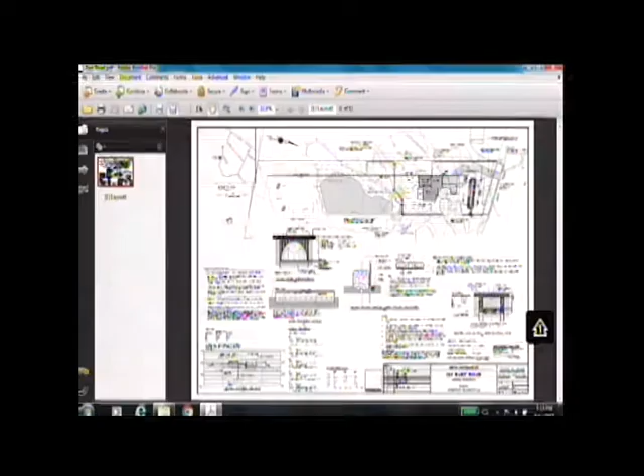Good evening. My name is Jim Swift, professional engineer, landscape architect at 102 Village Drive, Shelton, Connecticut offices. I was mysteriously absent from the last meeting where we were on the agenda. I was on vacation and had neglected to let Scott know to table the item, so I apologize to the commission for that oversight and confusion.

What we have here is an application for a single-family house that was approved in August of, I believe, 2012. And in looking to obtain a building permit, we discovered that there was an error on the plan.

If you look on this section of the plan, you'll see that there's a roof drain galley or infiltrator that was supposed to take the roof drainage from the house. It is going to take the roof drain from the house. And if you look up in this corner here, there's a domestic service well.

At the previous application, that well was located very close to the infiltrators. That's a violation of the health code. Wells need to be at least 25 feet away.

So having found that error, we corrected the plan. We moved that well to 25 feet away, to the new location that you see up where the indicator is. It's farther from the regulated area and meets all health code at this point.

When we filed that application to amend the improvement, Scott had done a report, and he pointed out there was also one other oversight in the 2012 approval, which is that the commission normally requires wetland signs be installed at the limits of disturbance. You can see that during the revision where I moved the well, I also now indicate where those wetland signs will be. So that's the limit of our application tonight, to amend this approval, to move the well, to add the signs, and I'd be glad to answer any questions the commission might have.

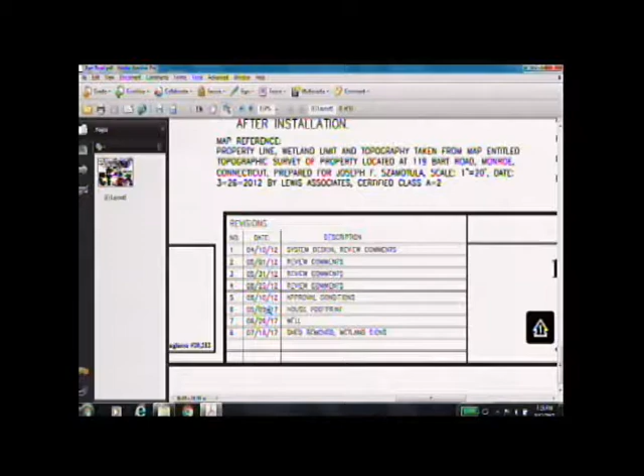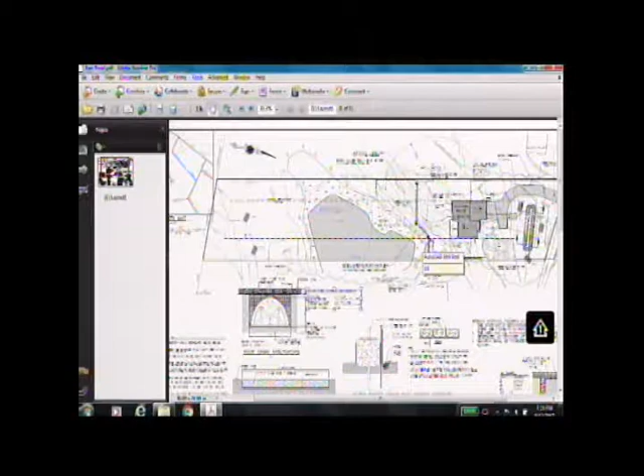So Jeffrey, this disturbance limit line comes up just where the fence is, up and over. There are activities that occur out there, but they're plantings. But you see how it jogs into the wetland boundary? See it V's in, the limited disturbance, well, this is the wetland boundary.

The wetland boundary is that thicker dashed and straight line that goes up and over, right here. And go back to C15, wetland flag 15, that circle right next to the planting, see that dashed line that goes into the wetland, down? That's a contour line. It's a contour line, but the limited disturbance line is shown to that.

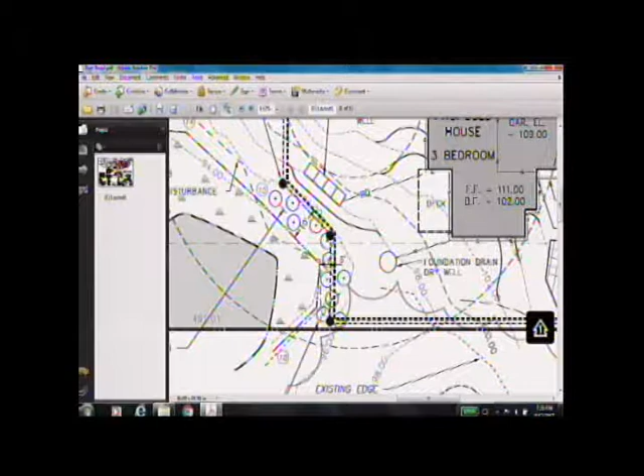I don't understand how that could be. So the contour line goes into the wetland, so are you filling the wetland? No, that's an existing contour. The proposed contours look solid, so this 94 line is an existing contour. It looks like a proposed contour line to me.

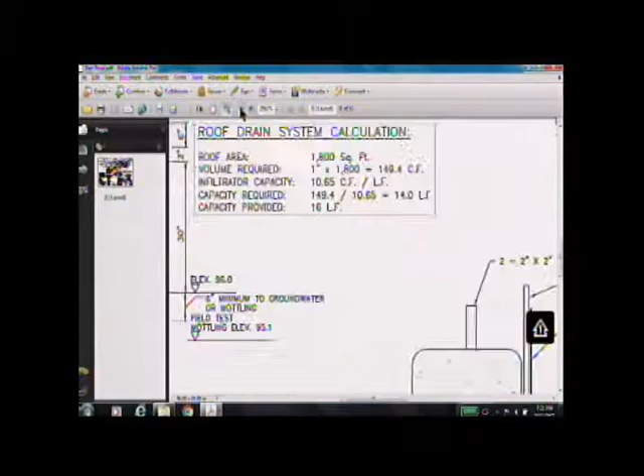Oh, I see what he's talking about now too. Yeah, it's a limited disturbance line. You're right, because it does have an arrow pointing at it saying wetlands limit of disturbance. What are you trying to do? He's trying to get back to that. Yeah, I'm trying to get back to that.

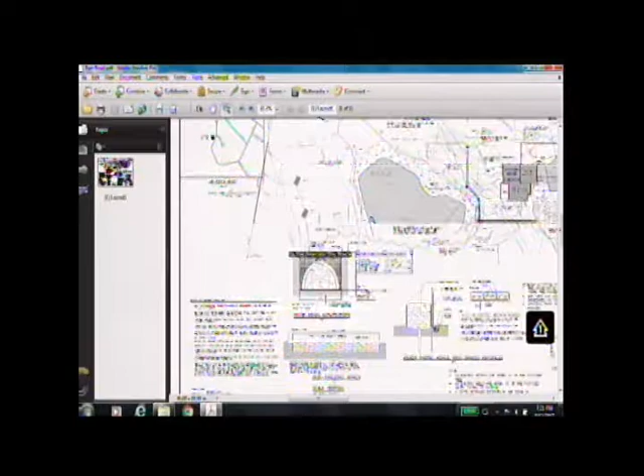I think I saw what Jeff is talking about. Now put it on the hand tool. Limit of disturbance - okay, see that line? There's the limit of disturbance. That line is an existing limit of disturbance, where, among other things, it's basically the existing limit of disturbance.

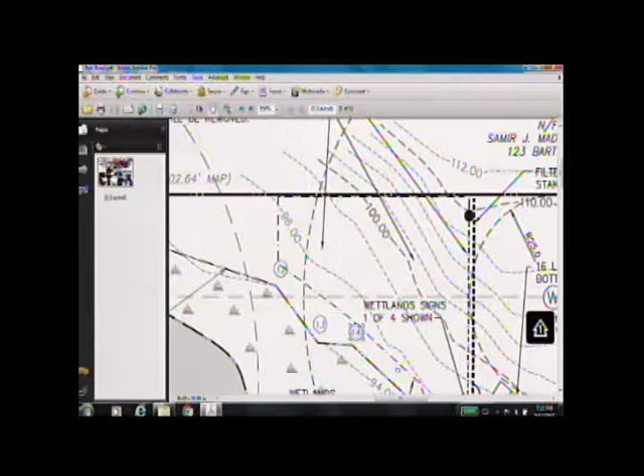And you can see how, when you come up in this location, you see tires and debris and deposits to be removed in that general area, and then you can see that dashed line. What that dashed line is trying to say is there's been activity in there. Yeah, I can appreciate what you're saying now.

There's this little triangle in here that's not a proposed limit of disturbance, it's what had been disturbed in the past. I think the idea in that triangle is that the disturbance might have been a tire track or something like that. At the time in 2012, it was just something that should come back on its own. It wasn't worth going in there and trying to regrade it or anything.

We do have some plantings in there. The only thing I was going to suggest is you could probably add 2 more nannyberry or something like that. I was trying to understand what that objection was - if that was a proposed limit of disturbance in the wetland or not. In the original application, when we went out to look at the property, they had disturbed that area when they went in to do their testing.

So if you were to suggest a couple more nannyberry, we would have no objection. So what's the condition of the area now, now that we've opened up this discussion, between the existing limit of disturbance and your proposed limit of disturbance? That area has been disturbed. What is its condition at this moment?

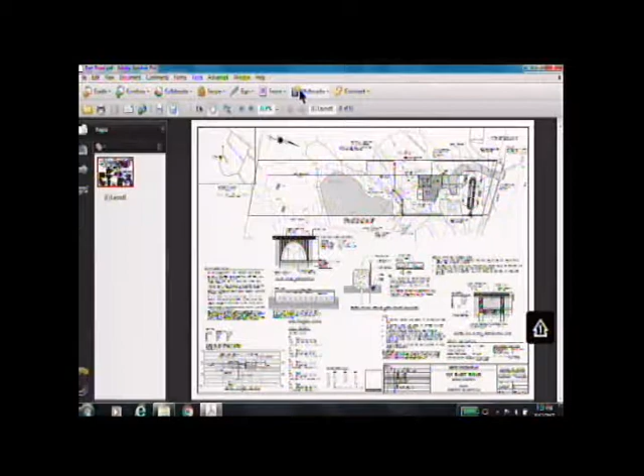Coming up next, IWC 2016-04A1, 34 Enterprise Drive, All-Star Transportation. This is an amendment to a previous approval regarding the water quality basin, removal of amphibian barrier, reduction of pavement area, and revised utility location.

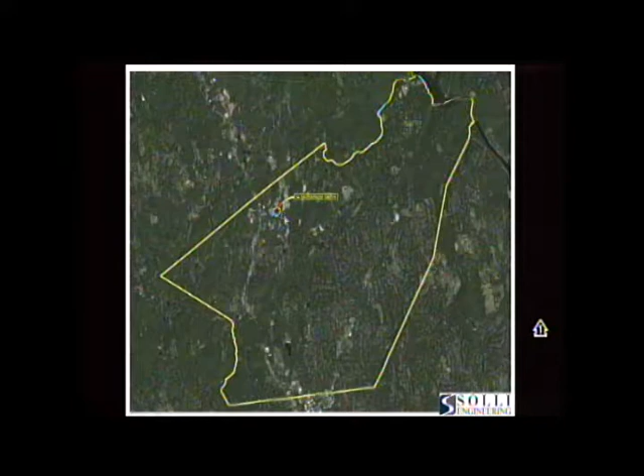Just to orient everybody, here's an area of Monroe. 34 Enterprise Drive is located as part of the Pepper Street Business Park. Here's an aerial of the site prior to site development, prior to approval. There are wetlands on the property.

The project was approved by the commission, and what it included was essentially a large bus parking lot for All-Star Transportation for the school buses for the town of Monroe, and a fueling pad and a small office for the bus company. This project has gone through construction.

There were some construction revisions that we had looked at, and we wanted to come before this commission to review some of those. Just to give you guys some history, what you may remember is part of the original approval.

When we first came before this commission, we talked about how we initially were proposing to surface this lot with millings. And there was much intensive debate regarding the use of millings on this property.

When we initially started that, one of our water quality measures to provide additional protection against the possible use of millings as a surface area was to provide additional renovation for any potential stormwater. So one of our considerations was we designed our basin to be wet bottom, so that standing water would allow for some additional renovation of the stormwater runoff from the millings itself.

During the approval process, we ended up removing millings from the plan, and it was proposed for that surface to be paved. However, we never went and readdressed or changed any of our water quality measures or modifications to the stormwater basin. It's one of the big...

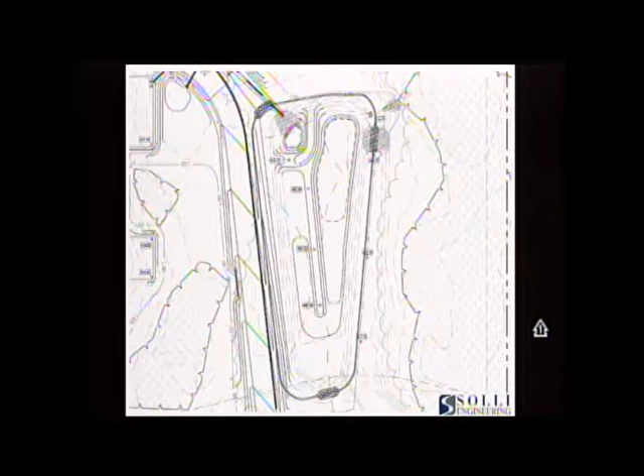This just shows—I should have gone to this slide, I forgot this was in here, Jim—this is the previously approved basin layout. You can see the sediment forebay meandering around a berm, and then this was the wet spot. And then you can see our proposed changes; it's very minor in terms of modifying the grades, but it does achieve the desired goals.

And we have actually been going back and forth with Scott as part of this project closeout to do our as-builts, to verify that the grading is achieving what our design intent was.

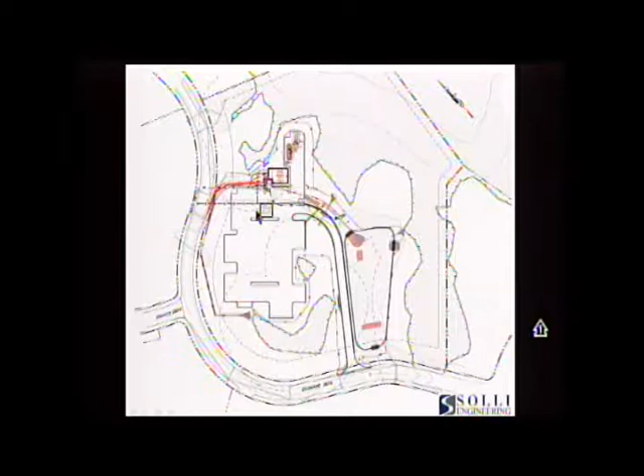From a utility standpoint, this is the previously approved utility plan. Very minor changes to the location of some of the underground utilities. We changed the septic system from a galley system to a stone trench system—it does not have any impacts to the wetlands. You can see very minor modifications to the locations of the utilities coming through here in the stub locations, and none of those revisions would have any adverse impact to the wetlands.

I think it's certainly achieved the goal. We wanted to find a place for the buses to park, and they've been able to do that.

On the first page of your memorandum, you also say that you're removing a swale that had been proposed. You haven't mentioned that. Well, that's the berm. That's the meandering through the basin. No, this is a swale that was proposed as a center island for the bus parking. I don't think you're parking the buses in the detention basin. Oh, that's true, excuse me, I apologize for that. At one point, and actually, I think that was actually one of your referral comments. We had initially shown

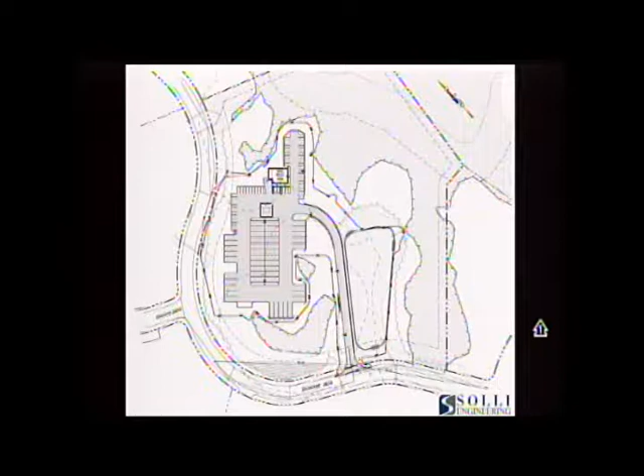Wasn't it also supposed to assimilate some of the drainage from the parking lot and treat it? Well, it was initially, but again, our primary measures were from a water quality separator here, which collects the drainage from this, and then the rest of this drainage does go into our swale and is discharged into our sediment forebay, which again meets the requirements of the water quality manual.

How come you removed the swale, or the berm, in the pond? We wanted to make sure we provided the necessary stormwater volume. So the serpentine swale that you had, it was for a water quality purpose, but you're saying it's no longer needed in order to meet the objective of your water quality volume?

Correct, yes. And again, in the absence of your participating in the original commission discussion, a lot of that was because we were proposing millings. We wanted to make sure we had that additional renovation, so that's why we initially proposed that berm in the first place.

The question I have is, I don't understand, if you're taking that wet bottom and you're keeping the elevation, basically the surface of the water the same, why would you change your total volume of the pond at all? Well, we eliminated the wet bottom, so we brought it up a little bit. I mean, if the pond is full all the time, then you're not getting any additional storage.

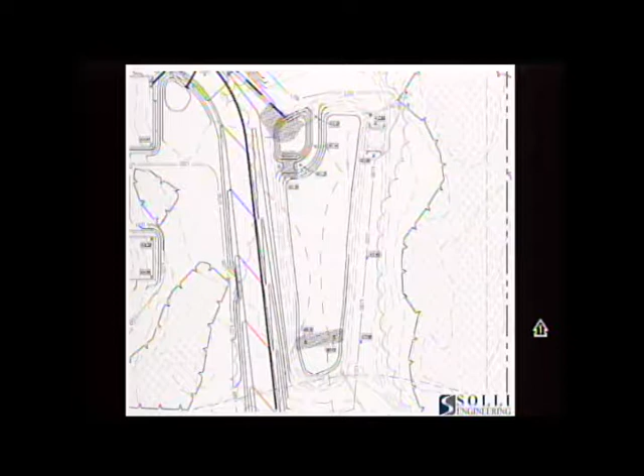Sure. The other consideration for that, and again it's all slowly coming back to me, was the outlet control structure. One of the other components of our previously approved plan was actually modifications to that outlet control structure and reconstructing the outlet. We wanted to revise our model to try to keep that outlet control structure so we could avoid the disturbance of putting in a new structure and potentially the outlet that discharges to the wetlands. We've been able to maintain that existing outlet control structure to eliminate some of that additional disturbance in the basin itself. So by revising our analysis to reflect the existing outlet control structure, it required minor changes to the grading of the basin.

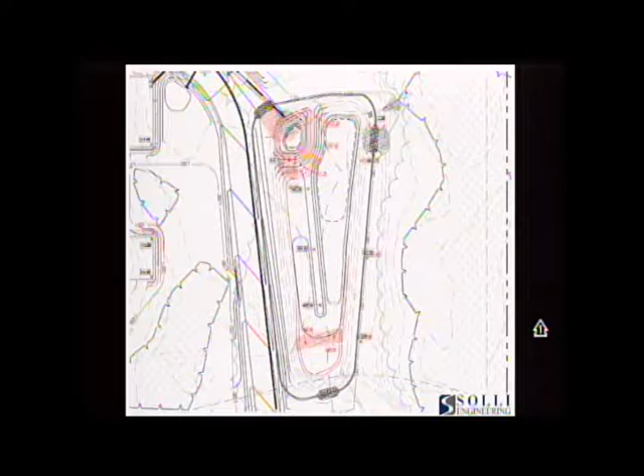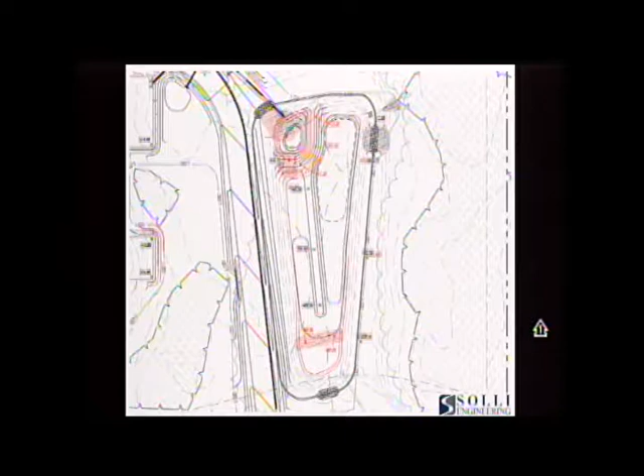You were talking about the amphibian barrier. Yes, in the original application, were there documented amphibian species observed on the site? No, there were not, but it was just a recommendation. There have been vernal pools established in close proximity in other applications, so we were within that terrestrial habitat, and since we were proposing the wet bottom, we wanted to make sure we were preventing it from being a decoy.

The next question was going to be if they found these cryptic pools, part of a swamp that will flood and you'll get species breeding in some of these, but they're not technically vernal pools, you could have those spotted throughout. There's a significant amount of wetlands here, so it's possible, but I understand, and would rather see a dry basin anyway.

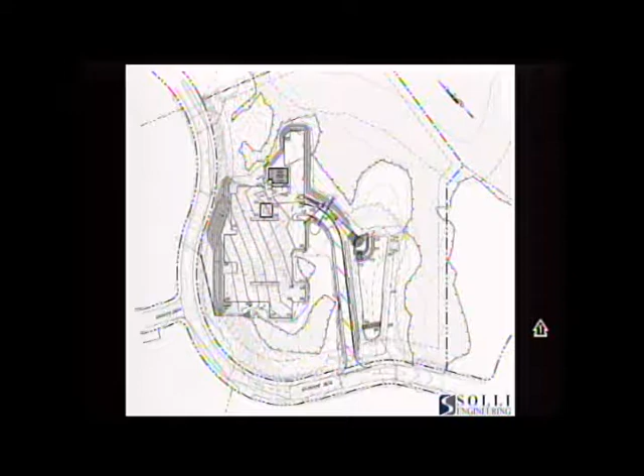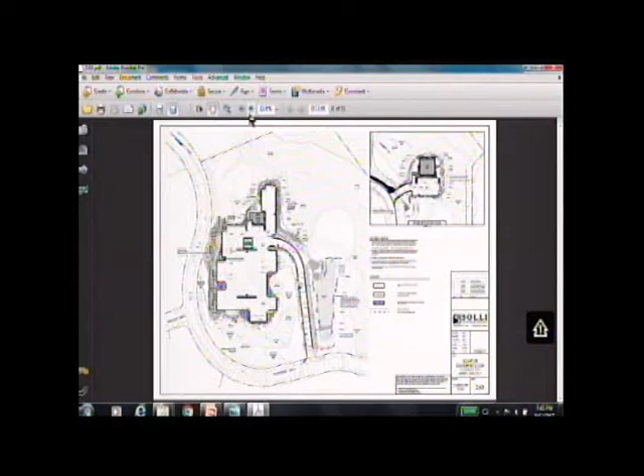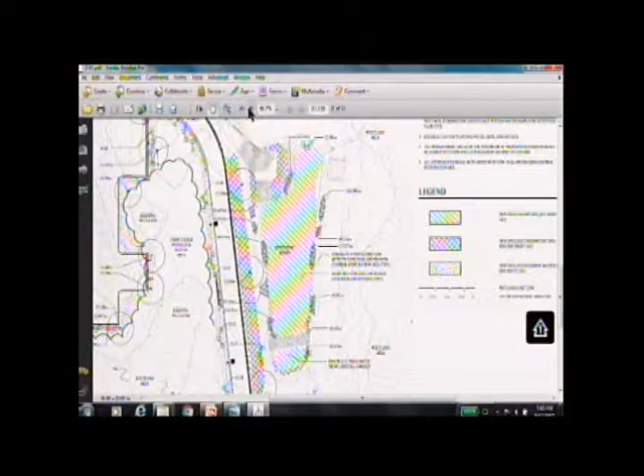Which leads me to, was there a planting plan developed for the wet basin that we should be looking at in terms of modifying for the dry environment? Yes, and we did make those very minor proposed tweaks. Previously we had a number of plants in and around that center berm, and we basically shifted them out to the edges of the perimeter of the basin itself. We maintained the same quantity and type of plantings that were previously approved, and just provided them around the perimeter of the basin rather than within the center.

So what's on the bottom of the basin? New England wet mix seed mixture. What's on the slopes right now out there? It was probably seeded with that at one point, but it's kind of just, yeah. But it's stable, right? Yes. But again, as part of this, there was some disturbance, and now it's being reestablished.

And essentially, this is the last item - surpassing this commission, getting this commission's approval will be the last item to let this property get its certificate of occupancy and continue to transport our children.

On the second page of your memorandum, under the grading and drainage plan, the proposed forebay spillway has been modified to include riprap stabilization with a 6 mil plastic sheeting. Is that normal? I don't remember talking about plastic sheeting. It's something we put beneath the riprap just to help stabilize it. It's somewhat of a standard detail to make sure that it's protected. We've been incorporating it into a lot of our details. I just didn't know about it. It's kind of out of sight, out of mind.

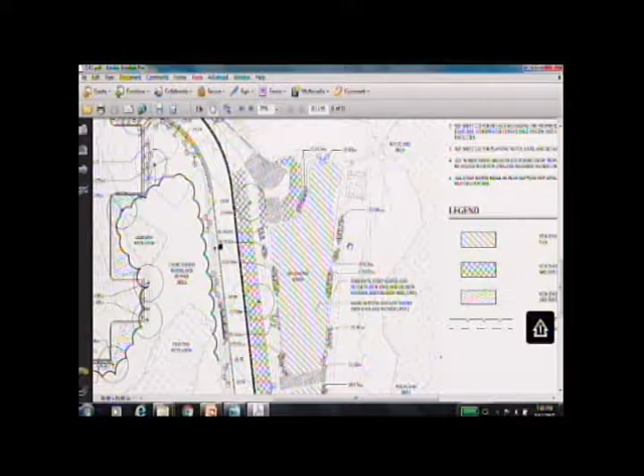I'm just thinking of ways of handling Enterprise Drive, if there was a storm event and you were in the process of mucking around in the basin, of handling that water.

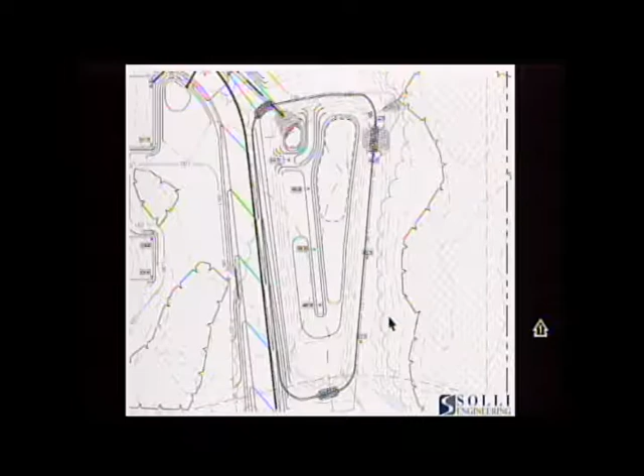The first step would be creating a stone berm as a forebay on that end temporarily. There is one shown on the plan - sorry if I didn't articulate that clearly. You can see here there's a stone berm and a forebay on this end, so the discharge from the town does go in there. We'd recommend writing a letter to Public Works suggesting additional maintenance of some stormwater facilities in the business park, because there does seem to be some sedimentation buildup.

But there wasn't a formal construction sequence, or am I missing it? Well, it was approved as part of the original approval. It wasn't something we were proposing to modify, so it wasn't included in this submission. But you're modifying an existing one in a different manner now, so how does that sequencing work? Are you saying the sequencing is the same? What we did to protect it is make sure we had those measures in place. Is this already done? Yes. So it's already in this new situation? Yes, it is, and it was done over a period of a couple days. Oh, I thought this was coming in to be proposed as a change. It is.

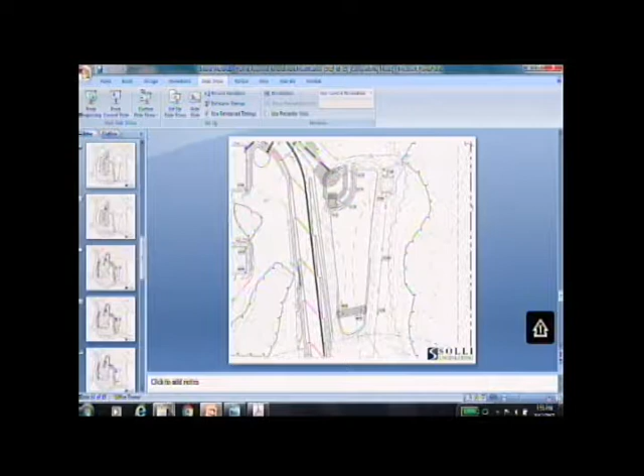So I feel pretty comfortable with this, but I just wanted them to verify that they have the information. Our surveyors were out there again today to verify the elevations, and they had met the 408 contour at the base. And you just indicated that you have the test pit information. I thought we had submitted that as part of this. I couldn't find any test pit information. I know it was in our analysis, but we can certainly provide that.

Following up on Jeff's concept, so if this project is basically done, then the drainage is already going into the basin from this whole bus yard, correct? Yes. So how are you going to plan to do the work, since you're doing so much change to it? Or is the change already done? Change is already done. So we're approving this after the fact? Yes. This is John Kimball, let me just step in here for a second.

I'm at 1428 Monroe Turnpike. The existing basin outlet was at 408. The excavation did not go past the approved limits of your approved plan. We excavated, we just didn't over-excavate to your approved plan, and we didn't install the berm. So we didn't do anything beyond the limits of what was approved already. We just haven't, if you said...

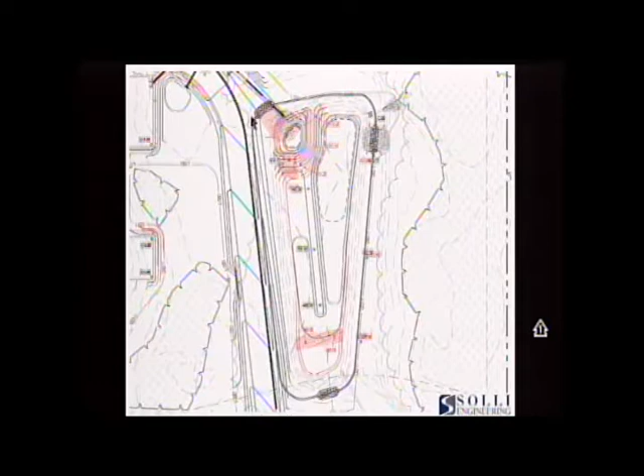So I just wanted to clarify that, yes, we've been in there, yes, we've done work, we got lucky, we did it, and we had the other benefit of this basin is that there were some major storms, and other than pushing the silt out of the town's pipe system on the existing forebay and ending up with a 12-foot slug of sand in the forebay, which we pulled out, and that was in the lower forebay that was pre-existing from the town.

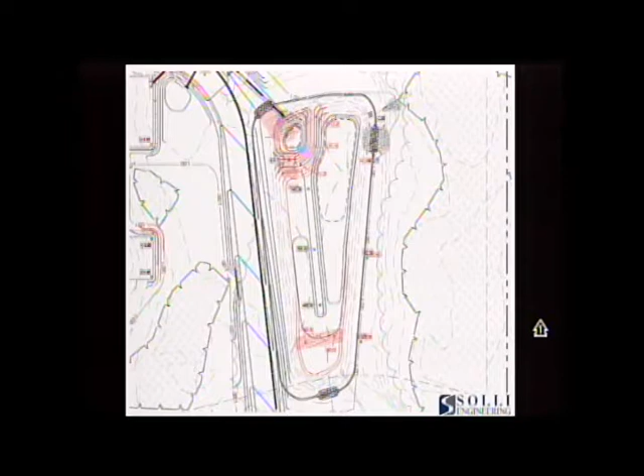The forebays haven't even gotten to the point where they've filled up at all. So the basin is essentially completely dry and has been dry for the last 14 or 15 years that it's been operating. The low elevation of the basin has always been at 408. So we have a pretty good assurance that 408 will maintain as dry, because it's been dry, it'll maintain as a dry basin. This basin has been installed since 2005, I believe, so it's got some history to it. Thank you for clarifying.

On the berm, right? The berm was made up of soil, right? Correct. So it's not as permeable as stone.

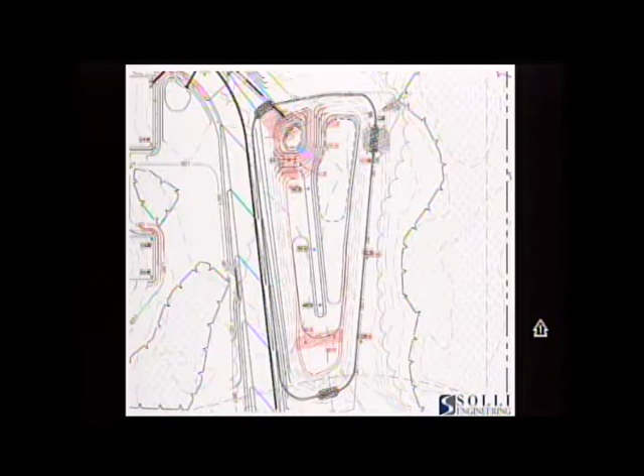And if that berm was instead stone, is that taking up your volume, or is it still permeable enough to work? So it's creating a berm, but... This would almost be a question for the town engineer who has to review the calculations. I would consider that taking up volume, because over a short period of time it's going to get contaminated with plant growth, and there won't be as many voids in the stone. I think you're really playing with numbers then. Yeah, I would agree.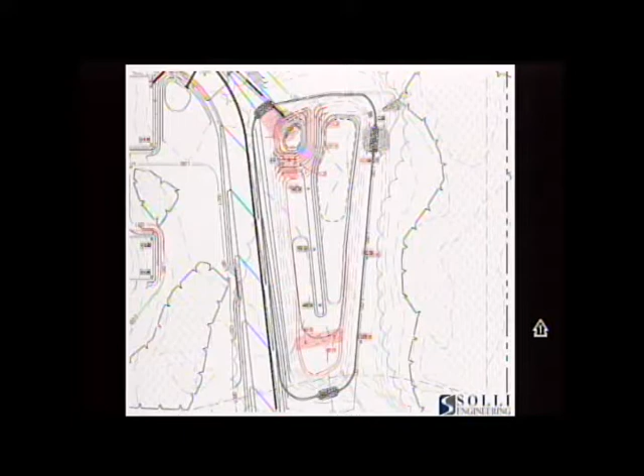Is there some sort of a barrier you could put in? A silt fence? You mean in terms of the amphibian barrier? No, no, no - as in creating a berm without taking up volume. I was trying to think of a plastic board or something that would create a diversion, though it wouldn't look too pretty.

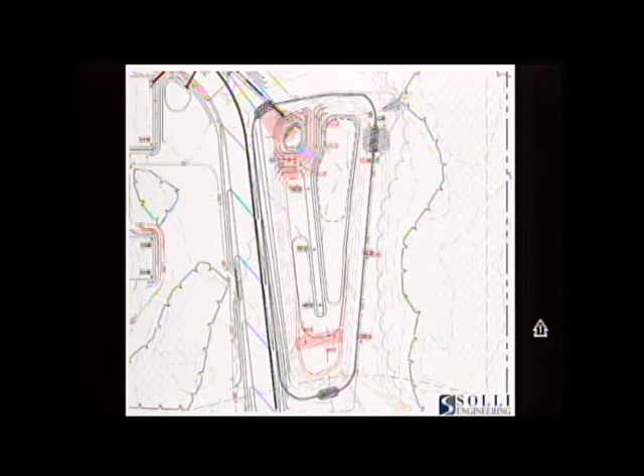So as an engineer, my question would be, why? To create a longer treatment time, a meandering path through the basin. We don't want the water coming in and going right out, with the inlet and outlet right there together. So by affording some length...

John Kimball again for the record, 1428 Monroe Turnpike. Scott's right, some of the hydrology in a lot of things doesn't work correctly, but this one works. I've been out there in the worst of storms, and this is a gravelly area - the whole area is gravelly - and the water basically infiltrates right into the ground in this basin. This one does not hold water. It's not like the basin at Axel Plastics or some of the other basins around town where we have issues.

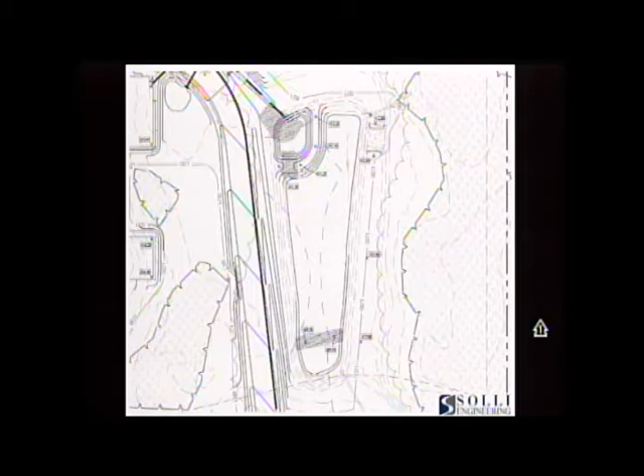So what's happening is the water hasn't even made it over the riprap berm on either basin, even in the crazy storm events - the highest reported storm events I've seen over the last 10 years. The basin gets water in it, but only the water that's directly falling in it, so it's clean water. I understand, and with Scott's question about having that test pit data, that would probably help answer some of the questions we have. Sure, and I was fairly confident that we had submitted that and reviewed it with Scott - if I'm mistaken, I apologize, but we can certainly provide that, because we're confident there's no concern about this thing holding water.

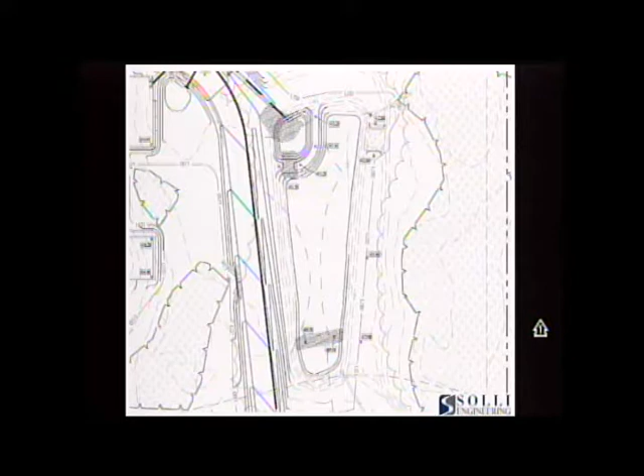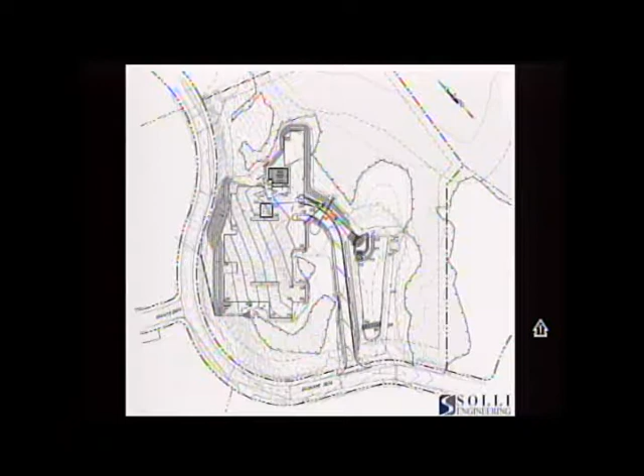Anything else from the commission? Anything else from the applicant? Not at this time, no - we respectfully request approval of the modification. Thank you very much, we will close the regular hearing. Oh, I'm sorry, do we need to do... no, it's an amendment. I'll figure that out before the end of the meeting when I'm not the chairman anymore. All right, moving right along.

Onto our enforcement section, IWV 2017-07, 127 Main Street - tree cutting past the limit of disturbance as approved in wetlands application 0415 Pondview and 0404S Pondview.

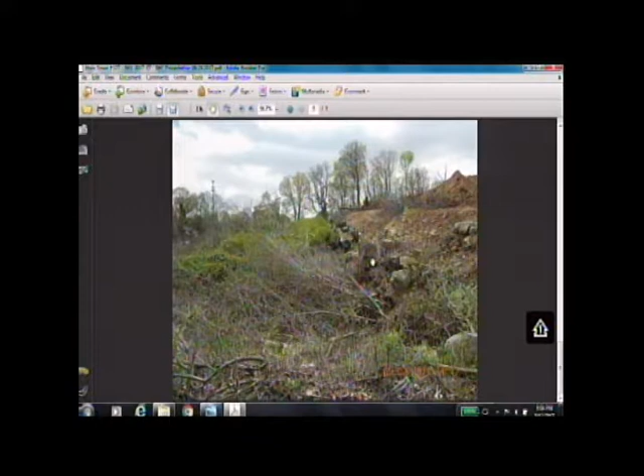Now, if you recall, you had this at the last meeting, and the request is that we notify Jay Keeler, the owner, to come to this meeting, and you also wanted to get a chance to go out and have a look for yourselves and check it out as well.

Again for the record, Kevin Solli - unfortunately Jay had a conflict and wasn't able to be here again this evening, but he would be able to come to the next meeting. One thing I was trying to get feedback on from the commission last time is whether the commission would be looking for a remediation plan to be submitted to address the trees that were cut. If that's the case, we're happy to prepare and submit that for the commission's consideration. But if you'd like to discuss directly with Jay, he's available - he assured me he would be at the next meeting on, I believe, the 23rd.

No, this was the informal hearing, the 27th. This is part of the application, the informal hearing part. That's why he was coming in, to explain it so you could determine what type of submission you wanted. So without him here, did anybody look at it?

I did. I looked at it quite a bit, just not formally. I drive by it quite often.

There seems to be a lot of trees missing. Yeah, I agree, a lot of trees missing. You can see some of them there, but you can't see terribly much at this point because the undergrowth has grown up so high that you can't see the stumps and trunks lying on the ground any longer. It just appears that they cut down a lot of the trees that were acting as that kind of buffer there.

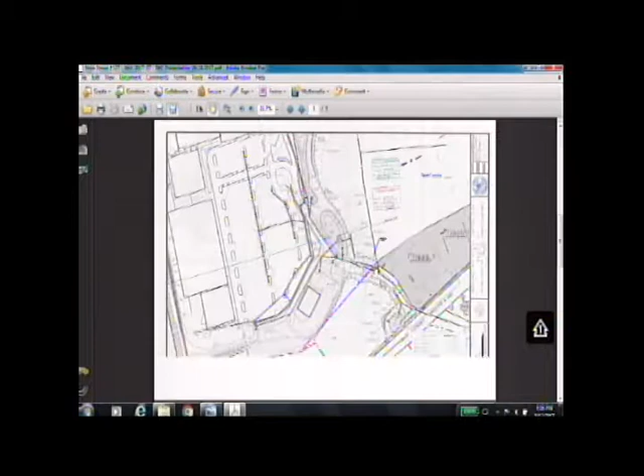I've only seen it from my car, from the drive-through at Dunkin' Donuts, but where are those trees laying? Right where they are. That's it, they just cut them and left them, from what I could see. Are they laying in the wetlands, in the upland, or in the wetlands?

Where are they? Can you tell us, Kevin, do you know if they were felled into the wetlands? I do not believe they were felled into the wetlands. I believe they're still in the upland.

Yeah, I mean, they were basically kind of right at, as you can see here, right along this stone wall. There were some in here. So it was well within the regulated area, but it was not in the wetland area.

We haven't field located those. As I testified at the last hearing, we are doing inspections as part of soil, water, and sediment control inspections, as part of the stormwater general permit from DEP, and I can testify there's no evidence of erosion in that location, no evidence of any sediment deposition into the wetlands. Even with the trees that were cut, they weren't grubbed or anything like that, but they were cut down.

So if the commission would like a remediation plan, I can certainly relay that to Mr. Keeler, the property owner, and we can work on that for you.

Well, do we need to hear from Mr. Keeler, or do we just want to let it rest? I think it'd be a restoration plan with plants, something suggested, because one of the major things those trees were doing was providing shade, and now there's none.

So I think at some point we're gonna be looking to have something put back where those trees were. I just don't know, do we need to hear from Mr. Keeler directly before we do that, or do we direct... we're still gonna talk to him, but at a minimum...

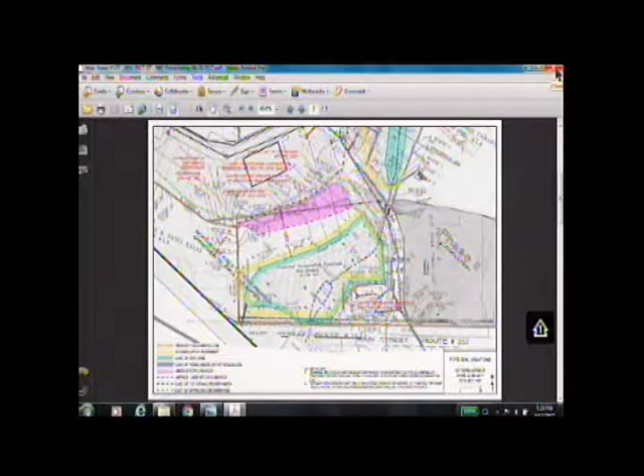Okay, section B, remediation submissions, ICP 2016-05, 35 Ridgedale Road, Delmedico owner, Pop Engineer.

That's scheduled for the next meeting, it's tabled. Oh, I'm sorry, that was one of the ones that we moved, 9/20. Yes, that was tabled from the commission and the attorney agreed. Yes, I'm sorry. That's okay, I had it marked on a different piece of paper. You'll get a hang of it eventually. We're here to help. I think I know what my application is for, chairman's gonna be.

All right, IWV 2016-11, 27 Dogwood Road, Silva, disturbance and unapproved structures within a regulated area.

Good night, Commission.

Your name and address for the record, please, sir. 27 Dogwood Road, Monroe. And your name? Ronaldo Silva. Thank you, sir.

Scott, would you walk us through this again? Okay, so this was an application where originally there was a let's call him a builder-developer that bought the property, was not you, right? No, you bought from them, or do you represent, are you the property owner? Probably one, my architect didn't show up today.

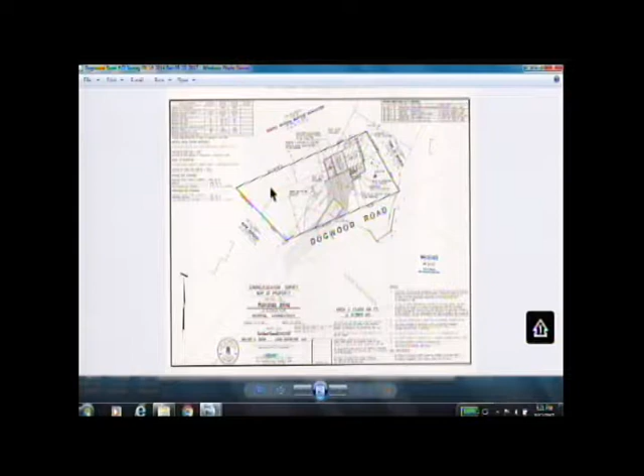They approved the deck, the land, the stairs - the deck had to be cut in half, almost. Yeah, they required some changes shown in the plan. I had put in my comments that that needed to be verified. There's a number of items I'm looking for anyway, so I can work with them to get a response, and I can get the letter from ZBA.

Okay, alright, thank you. So what we're gonna do is take this up at the next meeting - come in and see me about this and I'll get that information together. Thank you, thank you everybody.

What's the next meeting? I think we have - that would be 2 weeks from now. The 27th, October 27th. No, September, sorry, jeepers, what month? 2 weeks, we wish. Thank you.

Alright, you ready to move along here? Continuing with remediation submissions - is number 12 Maple or number 8 Maple taken off the agenda?

Number 8. Number 12 is taken off, right? And number 8 we're still dealing with? 8 is that's off, correct. 8 is off, 12 is on. I had it backwards, my mistake.

Okay, so IWV 2014-03-R, 12 Maple Drive, Rizio - remediation submission to address unpermitted fence, clearing of trees within 150 feet of a named watercourse. Submission review.

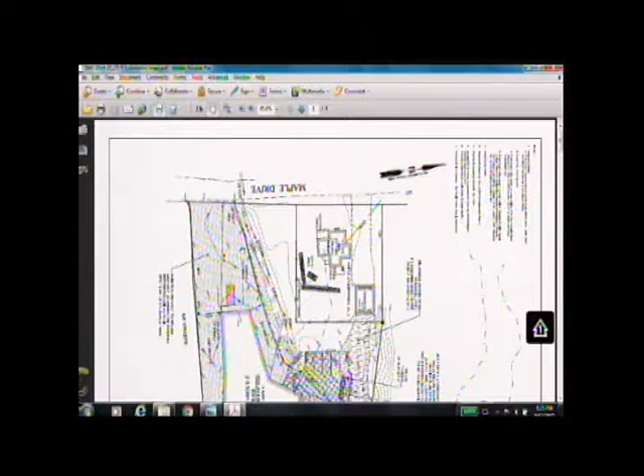She was using the same set of plans for both properties. So if you look on that plan, you'll see that for 12 Maple there is a very small area that is to be remediated. There's no proposed development on 12, so she came to talk to you about that and to present the remediation for 12, and that's why she's here.

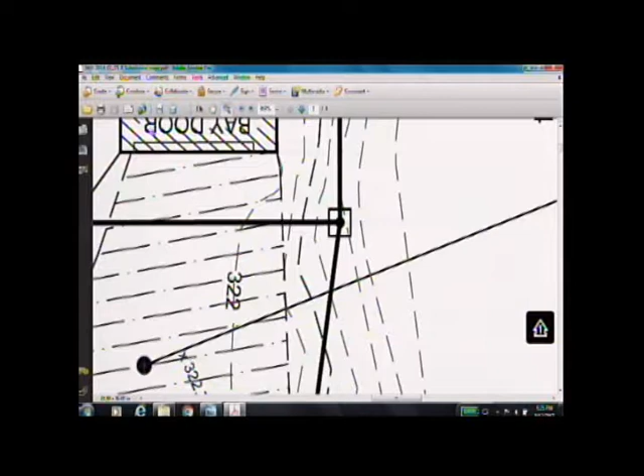So 12 is just that little square in the top left part, okay. They're two different lots, and that's the - 12 is a light industrial district. It's a pre-existing non-conforming residential use, so there's a house and a garage. You can take it from there.

Hi, Millie Rizzio, I've been here many times. Welcome back. I feel like I should be sitting up there. This is the area in question.

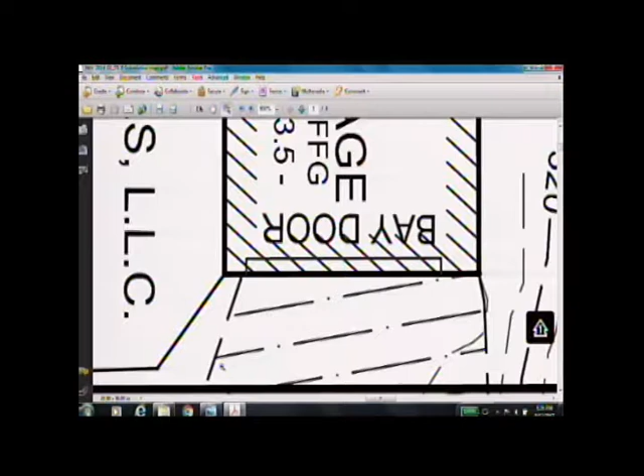Okay, where we had put some millings down because we thought it was a good thing to do. And we have to remove the millings now, and we have to put new topsoil down and some loam and replant some grass. The other violations were that some trees, I guess it said, needed to be planted. But however, the area in question is this particular area right here - it's about 5 feet by about 22 feet.

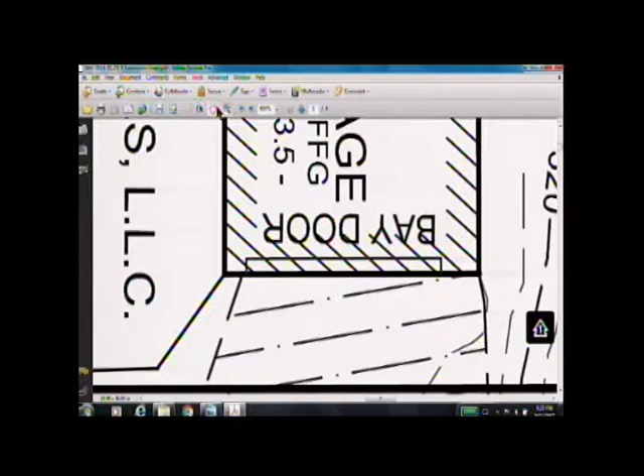So basically, what we're looking at is unpermitted clearing and thinning of trees within 150 feet of a named watercourse. I'm sorry, I don't see where this happened. Can you tell me where this happened? Yeah, let me just show you. My understanding is that - let's zoom out so we get a better view. Whoops, don't you hate that? Alright, let's try it again here.

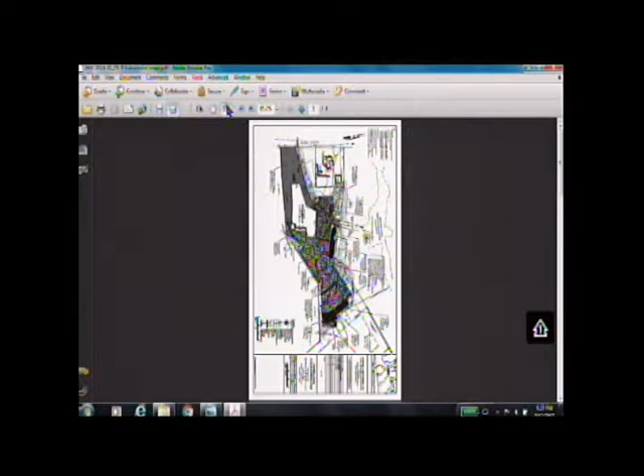All right, so here is the property right up here. So we're talking about number 12. You got the house, you got the garage. What he was talking about is right along here, there was a few trees that had been taken out.

There were no trees taken out over there. Well, I'm not real familiar, but right over in here there was growth, and my understanding was that it extended a little bit onto this property. I could be wrong, but I thought that this area in here, where you're looking at right now, which is right here, yeah, this...

had pine trees on it, which originally, when we had done this building—this was a 5,000 square foot building, number 8 Maple, when we first purchased it. We did addition after addition, parking lots, gravel, whatever. And the town at that time made us put up 75 pine trees, white pines. This was back in 1980, '79, right around there, when the buildings were first done.

Those white pines didn't last too long. Eventually, over time, they either became diseased or got hit by storms and fell down. There are still some white pines on the property, but maybe only 20 left of the 75 we originally planted. Mind you, this is what they asked us to plant, white pines. I would have picked something else, but Dan Tuba at the time said he wanted white pines, so I said okay, fine.

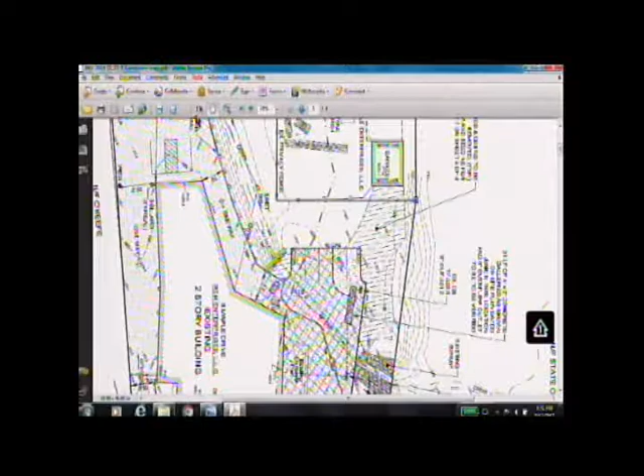This was cited how many years ago for tree clearing? Again, we're not talking about 8. I know, I'm not talking about 8, I understand, 12. Let me move this around so we can see what we're talking about, because we're talking about such a tiny area. Yeah, that's why I had her come.

Let's see, we want to go counterclockwise. That's why I had her come, because she's coming in with a whole plan for this property. There's various violations, there's remediation work, there's proposed work. She's going to be coming in with that. I've got to work with them to get an application properly processed.

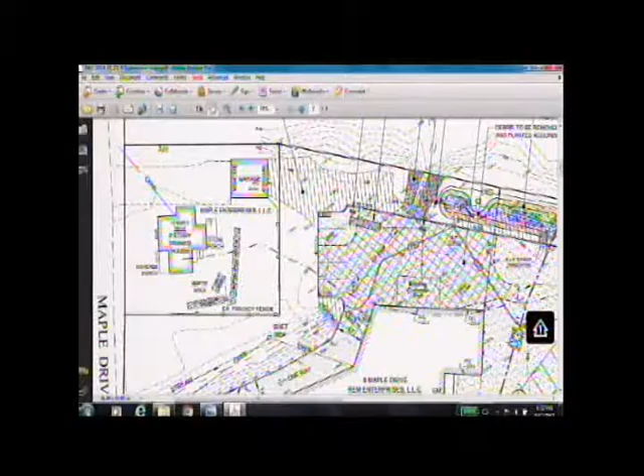However, this front parcel here has the house, has the garage. There's a door in the back of the garage, and this shaded area here is Millings. What was happening was they were accessing the garage from this property, and we pointed out that doesn't comply with wetlands, because it's within the 100-foot upland review area, and it doesn't comply with some of the zoning requirements. So they are going to be addressing that.

You can get a sneak peek here—they're proposing this as their parking lot, which more closely matches the originally approved parking lot. And they're proposing to take this Millings out.

Literally, what she's here tonight for is this little tiny rectangle here. It's about 5 by 22. That is the only work on this property that she's proposing. She's proposing to take the millings out.

We're not worried about any possible tree removals. No, I didn't have that in my comments. I don't know where you got that from. It says unpermitted clearing. Seems like it should be. Pretty simple.

Over it. Good job. You guys want to see the side? I'm good. We're good, we believe it. I'd be happy to show you. Have a good night.

She wants to remove the millings, loam, and seed it with grass, just behind the garage. Just grass.

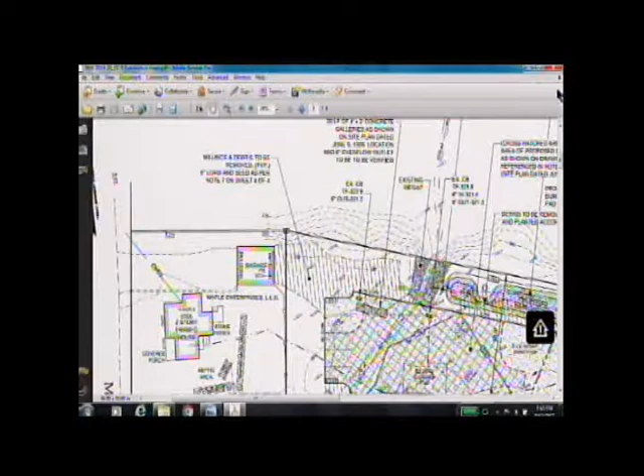But I have to pump the system every quarter or so to make sure it doesn't back up into the house. I would have liked to have done it sooner, but unfortunately septic systems aren't the least expensive thing to do, and I couldn't afford it at the time. Now I can afford to do it, and I don't know what kind of consideration you guys can give me to try to speed the process along because of this intermittent water course that I have. That's really the nutshell of it.

Scott knows a lot, he's met me before, and that's the reason why I'm here. This was the letter that you received in your packets regarding it.

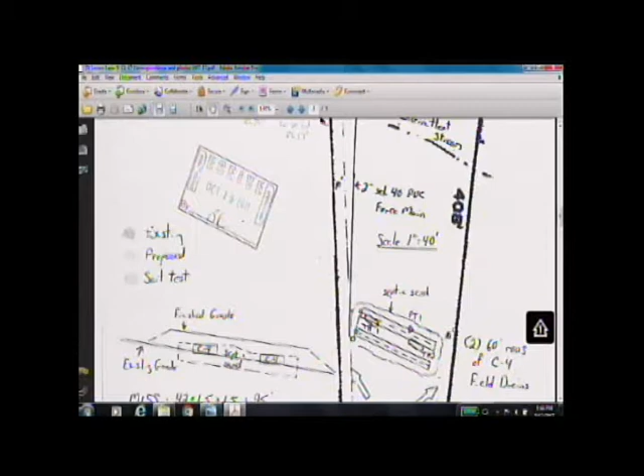Is it a pump line, a pump? It would have to be a pump, yeah. Unfortunately, I wish it wasn't, but there's just nowhere else. It's not that the lot is small, it's a good size, but Rich Jackson hasn't been able to find any really good soil there to put this unit, and the best place was in the rear of the lot.

I'd like to put it right back to where it is now by digging it out. I know it might be a little more work for us to do, but I'm not sure his stance on whether there's a better place to put it, that's the reason why they want to put it there.

And we know that's not wetlands? Well, no, let me explain a few things I need to.

A number of years ago, I think Lois is the only one that'll remember, when he bought... sorry about that. That's all right, I might have to have been here, but that doesn't mean I'm going to remember. It was ten years ago. I was here, ten years ago. So, early in my tenure.

He bought the house and was trying to renovate it, and he crossed this intermittent stream and cleared the woods that were over here. Back then, we didn't have a real clear process for dealing with enforcement and violation issues. He came before the commission, I explained there were pictures, and to make a long story short, what happened was, the request was to say, don't go on that side of the intermittent stream anymore. Take the board or a couple boards they were pushing the mower across out of there, and leave this area over here to regenerate. There was a discussion about, well, the seedlings are already coming back up again, let it go.

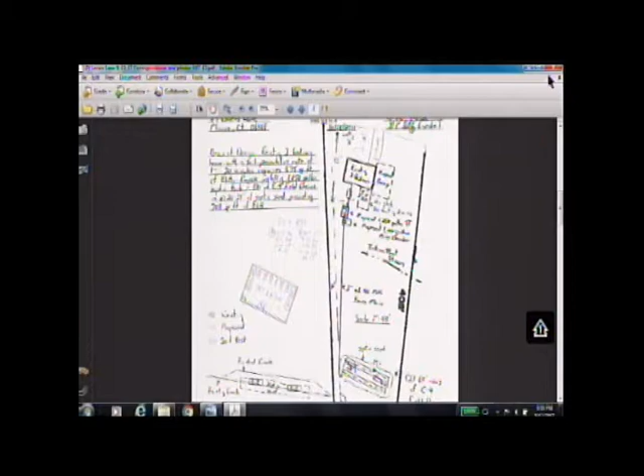In your packets tonight, you also got an email from Ross, who couldn't be here tonight, but who did walk the property and sent me a report for all of you for tonight, so that you knew what he saw. And then Jeff, if you were available and did that, you could also provide your input as to your thoughts or observations. Thank you.

Right, I guess my initial question was, could we, since they're here and there's no one else after them, bring this up now, so they don't have to wait for all the other stuff? Only caution is that this is not a remediation submission, so you don't want to get too deep into what should be done and how it should be done. What we're discussing at this point is, what is the process, and when does it happen?

My name is John Rivas, by the way. I represent the owner of both properties, Bruce Mondo. I was under the impression that we did need to be here, given the notice we got, but even still, if we're just discussing timing, I'm happy to maybe make a suggestion based on my conversations with Jim Swift, who was here earlier. We've engaged his services for a remediation submission. Before you go ahead, I don't think that we're there, right? We're here as a commission tonight on the agenda. It's maybe to discuss with the commissioners that did make it out, what they saw, and decide what we wanted to ask you for as far as.

Well, it's a little helpful in that if he's indicating to you that they've hired an engineer, that type of input may help you decide what kind of timing you're going to establish for this. Thanks for clarifying that, Scott. I just want the timing to be realistic and not a pipe dream, no pun intended, given some of the issues on this property.

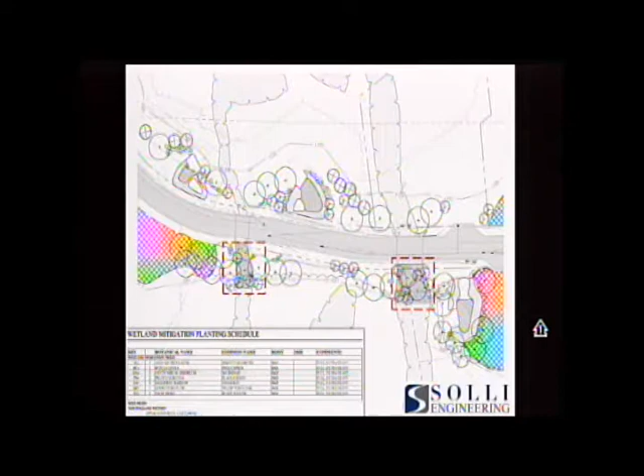Well, you can't - unfortunately you ran out of time. The impression I got was because you ran out of time, you really didn't - if you weren't out of time you would have been asking for more information. Well, how about denial without prejudice, because we don't have enough information? We had to close it last week.

Isn't that what the proper procedure is? The problem I see is that they had an approved plan, right? Yep. And I think we agreed that this is a better location for the road, for them, from an engineering standpoint.

Well, not from an engineering standpoint, I thought it was a wetlands standpoint, a smaller wetlands impact. Taking that into account, it was less than it should have been. Yeah, if they did it right the first time. The other location was further away from vernal pool 3, and that was one of the issues, being within the vernal pool envelope.

And remember, now you're into the territory of the referral, and that is not only the road but the lots. So the other part of your discussion here is: is the new layout better than the previous layout? And do you have any concerns about any of the lots or the layout of the road? That's the other half of this.

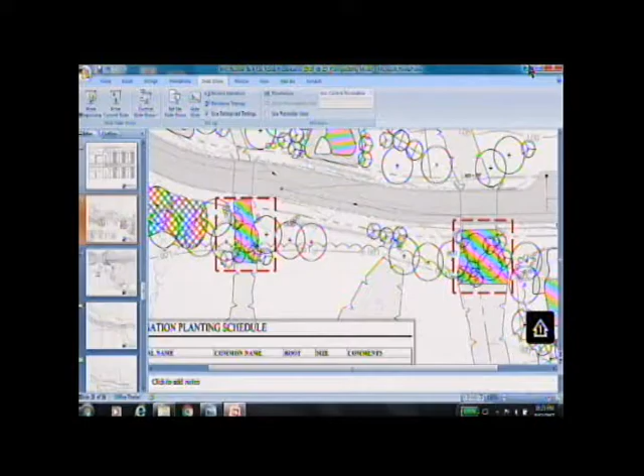Deliberations. I was in the process of suggesting that you circle back around and talk a little bit about the subdivision first. All right, subdivision. And can we approve the subdivision without the road? I don't think so. We're not approving a subdivision, we're making a referral. Can we give a positive referral to a subdivision without giving a positive referral to the road? Well, I guess you could, but it wouldn't make a lot of sense.

What you're talking to the Planning and Zoning Commission about is whether the layout of the subdivision is appropriate to minimize impact to wetlands. There may be some regulated activity associated with building the road that you have an issue with, but have they demonstrated that the subdivision they've laid out is minimizing impacts to wetlands?

I don't know how you say that you're minimizing impacts to wetlands with lot lines, honestly. It's hard for me to fathom that. Because what happens is sometimes a developer will come in and show a lot that isn't practical to build on without impacting wetlands, because it's full of wetlands, or it's too skinny, or it puts a wall around a vernal pool.

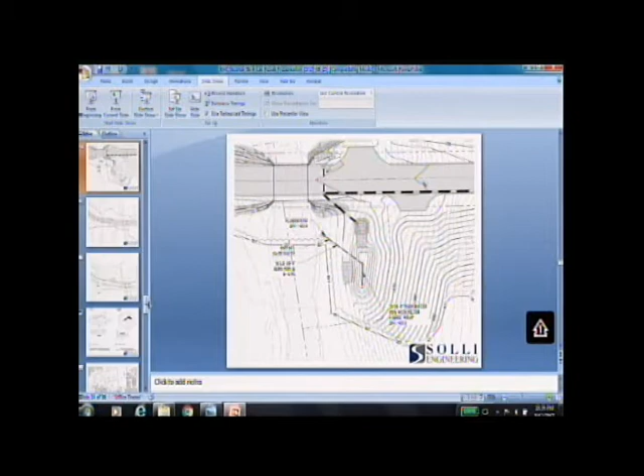My other issue is with lot 29. They've expanded this slice to be 150 feet the whole way up to the back portion of the lot, which satisfies zoning requirements of having to be able to put a box. What's the size of the box? It's 150 by 150 feet.

They show that's why they changed the property lines here, because Will pointed out to them that they couldn't fit a box over there. So they changed the property line, and now they have that box. Yeah, but didn't they add more this last time around? They added another 13 feet or something to the rest of it to make it 150 all the way up? Yeah, I think you're right.

But my problem with that is I would have a lot of trouble approving something. Now, this is a large industrial park. They are not going to build a small building on that 150-foot square. That is going to become a roadway or a driveway to this flag lot. Remember, if someone comes in and shows a potential development plan that's only using this area, and they have a huge area back here, you're not obligated to approve that.

They've come in and showed you, hey, we can build over here and minimize impact to wetlands. If they came in with a big plan to do something way back here that was really large, you could say, well, haven't you submitted a plan showing a more feasible and prudent alternative? Ironically, what they're showing for Lot 30 is the opposite. They're coming in with the big plan originally, and theoretically it could be developed with something smaller. That's the first time I've ever seen someone do that.

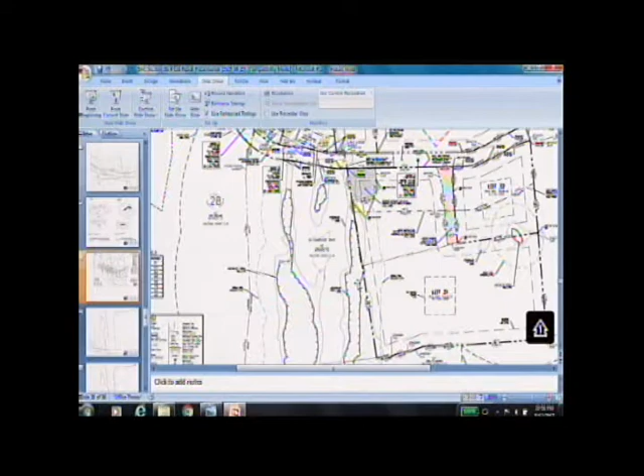Right. But, you know, to Jeff's point, he did ask him twice. What is he then going to do to fix this? He did admit he would take care of it right away. Okay, but then, did that happen? Is it enough to deny the application?

If you deny without prejudice, because did we as a commission push hard enough for that information? How hard does the commission have to push? Well, that's what I'm asking. You're not going to get a clear answer on that. Right, I know, well, yes, plus what they showed.

I guess it's not us. So I'm like, do we feel like we did enough to get that information, and they didn't provide it? Then, to me, that's clearly a reason to deny the application. If we as a commission feel like we did enough to ask for that information, and they didn't provide it, then that is clearly a good enough reason to deny the application from a wetland standpoint.

Okay, so on the road, you guys are leaning toward a denial, and the first thing is you don't think that they provided the requested remediation enough. And I'm going to tag on to your A2 survey requirement for the limits of disturbance.

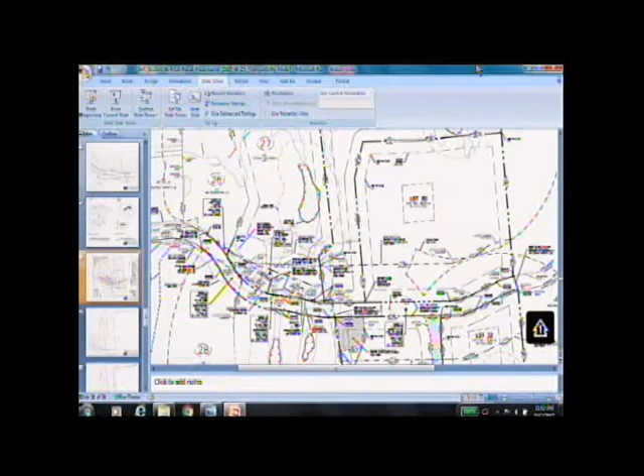All I'm saying to you is, I'm not hearing anything on the subdivision, you're just gonna have to resolve that, each of you have to resolve that and bring it to the next meeting, because I'm not hearing anything specific.

Okay, all right. So let's do that, we'll all do the best we can.

It's 11:05, what else do we have left? We have one more deliberation, the 124 Enterprise application. We just closed it tonight, can we delay it till next time? No, the meeting is closed, we have a draft approval, we just have to vote on it. The decision deadline is 9/27, but you can postpone it. There's a timing issue on that.

If you want to do it now, I have to explain a few things and go through the draft. Or we could delay it. You have until the 27th to make a decision, same deadline either way.